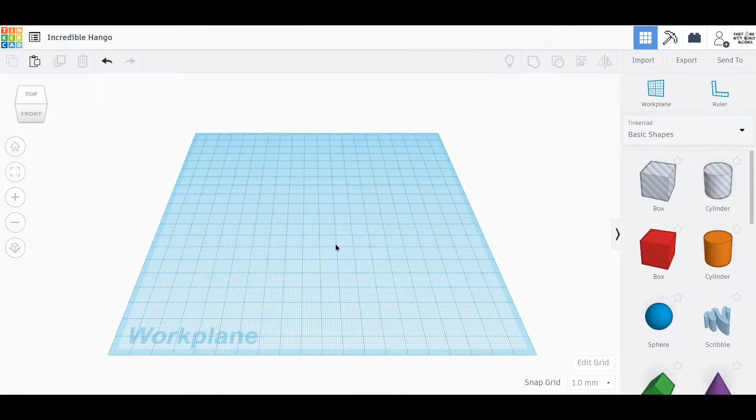Okay, let's get started. We'll begin with making the Deathly Hallows sign. We're going to do this in three main steps.

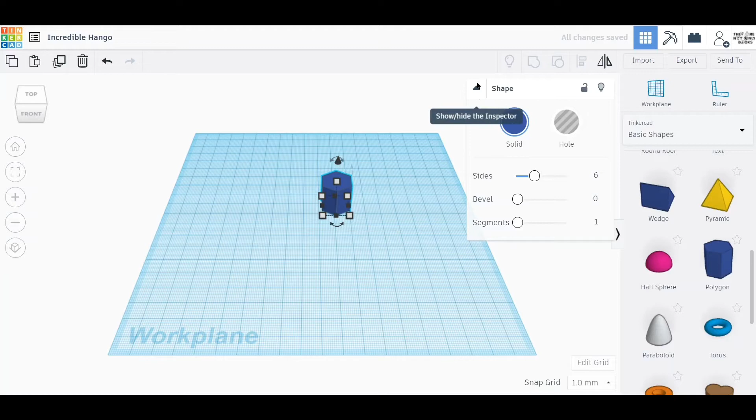First, let's start with this triangle shape. On the right side, we can see the polygon shape. Let's drag it over to the middle of the workspace. Since we're making a triangle, let's click here to open this menu if it isn't opened already, and set the sides to 3. Let's adjust the view a little so we can get our model at a good angle.

Let's use this top white dot to make the triangle a little flatter. If we hold down the Shift key while dragging this corner white dot, we can keep the shape the same while making our triangle bigger.

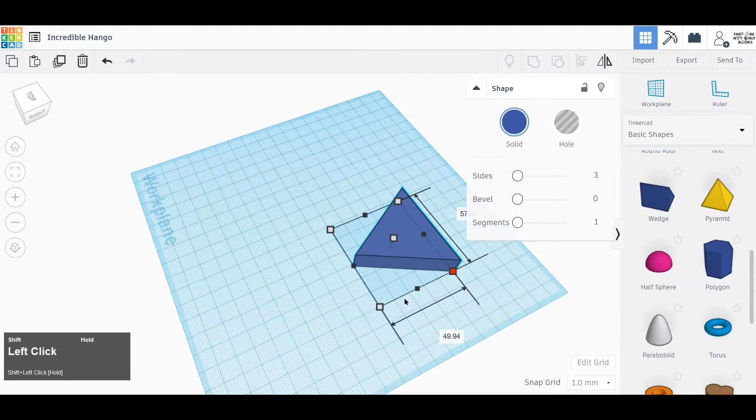Let's learn about holes now. Up until now, all we've been doing is adding shapes. There's also a way in Tinkercad to remove material. The basic idea behind this is to create a shape and turn it into a hole that will carve away from anything solid it's touching.

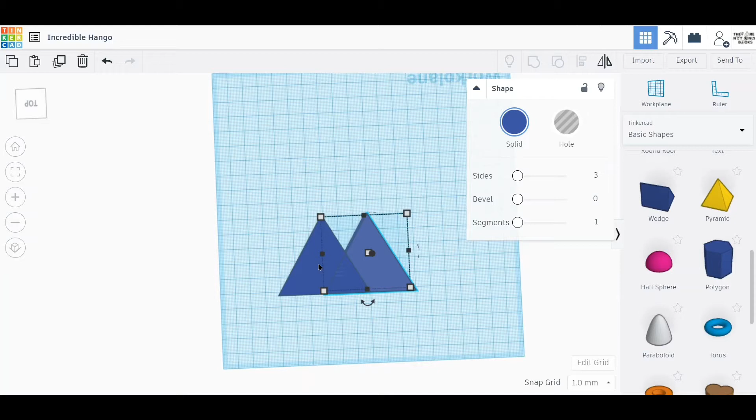Let's use this triangle as an example. Let's copy using Ctrl-C and paste using Ctrl-V our triangle to create another one the exact same size. Let's shrink it a little bit using the corner white dot and holding the Shift key.

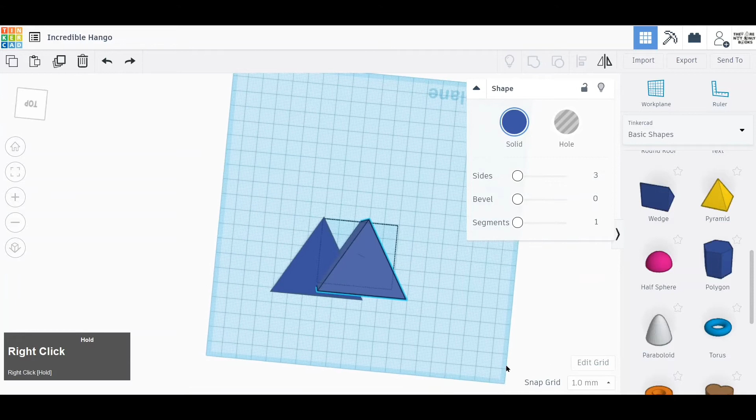Let's go to this view so we can make sure our new smaller triangle is taller than the original one. Alright, let's return to the top view now. Let's drag the smaller triangle over so that it looks about centered with the larger one.

Over here, let's click this button. It turns the selected shape into a hole. Now, to actually carve out of the original triangle, we have to do what's called grouping. This means that Tinkercad will treat the grouped objects like a single one. It's also good for making holes.

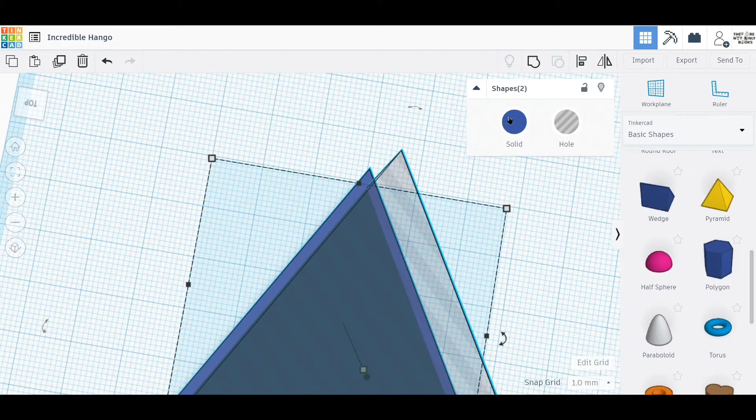So we'll click on one of the triangles, then hold Shift, and click the other triangle. This selects both of them. Now we'll come over here and click. This will group them. Great, now we have our triangle.

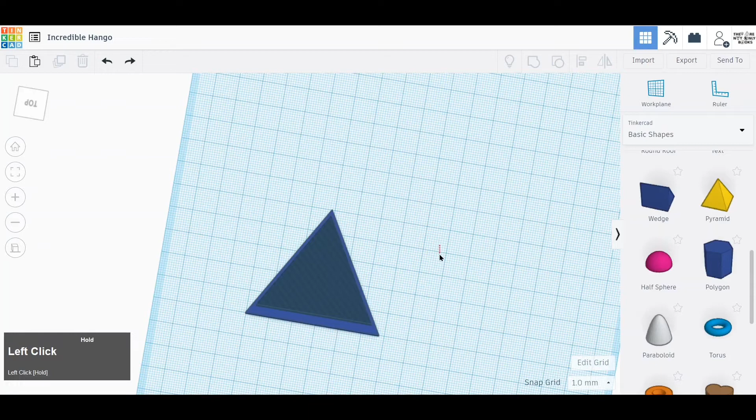Quick note, if you're having trouble centering your triangles, or it's difficult to make out how large they are, you can click this button over here. This new view is called orthographic, and it shows everything on a 2D plane. If you change the view to the top, it can be way easier to see how the shapes look.

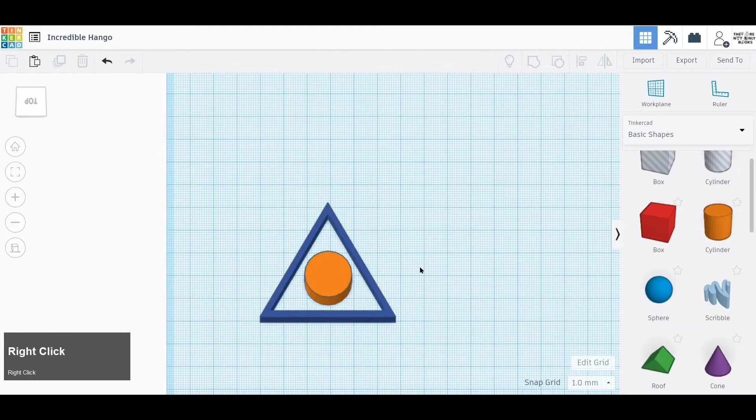Anyway, let's get back to this. Next, we're going to add our circle. Let's start by dragging over a cylinder and centering it inside the triangle. First, before we do anything else, we need to make sure our cylinder is touching all the sides of the triangle. Let's do this by orbiting around. If it's not touching on all sides, make the cylinder just a little bit bigger.

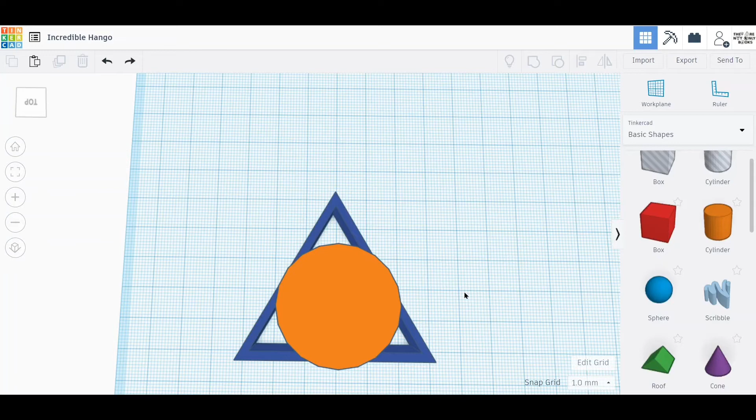Now, just like before, to make this shape a circle outline, we're going to add another smaller cylinder and make it a hole. So let's drag over the cylinder, resize it to be a little smaller than the original, make it taller, and drag it to center over the other cylinder.

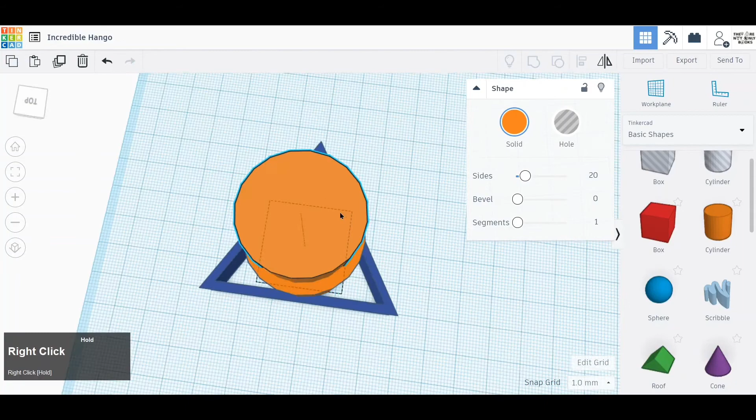This is where the benefits of orthographic view come in. From this view, it looks like our new cylinder is way bigger than the old one, but if we change our view, it clearly shows that it isn't. Using orthographic view gets rid of this illusion. Now it's easier to center it accurately using the arrow keys.

Now, just like before, let's make it a hole and group it with the other cylinder.

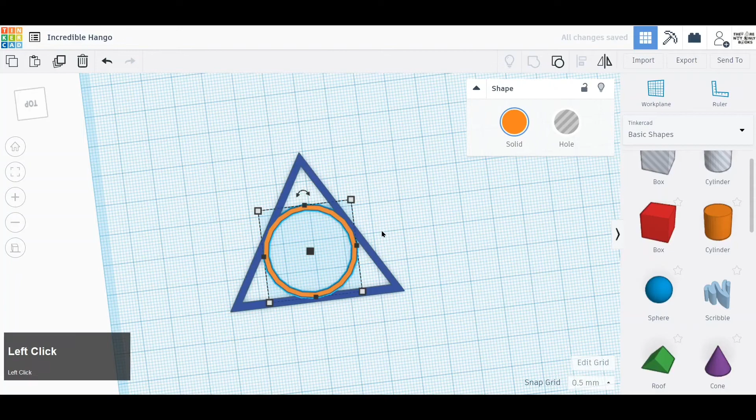Now let's do the last part of the Deathly Hallows and add the line. This step is much simpler. Let's drag in a cube and change the size in a way to make it look more like a line. Now let's drag it over to finish our symbol.

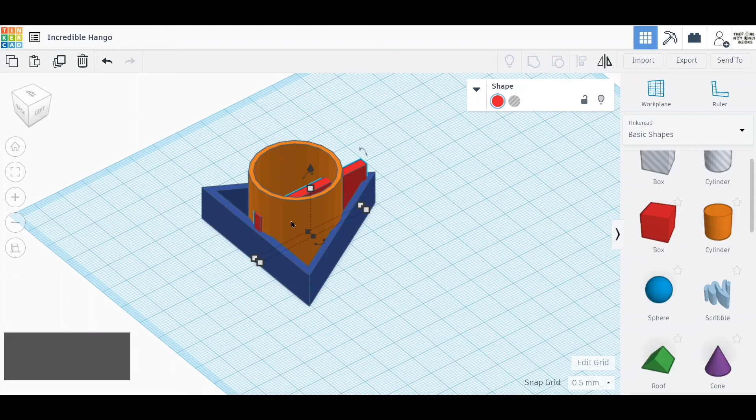Looks great. If we change our view, we can see that it is way too tall for a bookmark. Let's click on each object and change the height.

Now the last part for a bookmark is the part that'll mark the book. Let's drag over another cube. Let's stretch it out to make it the right size, and let's flatten it out to make it level with the rest of the bookmark.

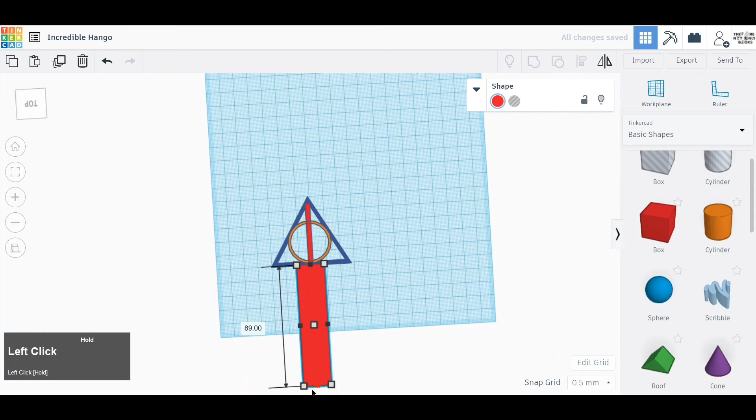I think it's important to note that Tinkercad shows us all these different colors so it's easier to look at the different shapes. If we did print this, it would be all in one color.

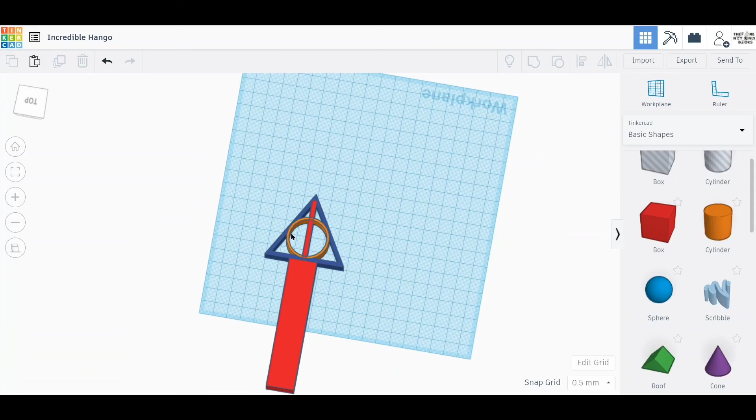And that's it. Looks good. Please share a picture once you make this model on Tinkercad.